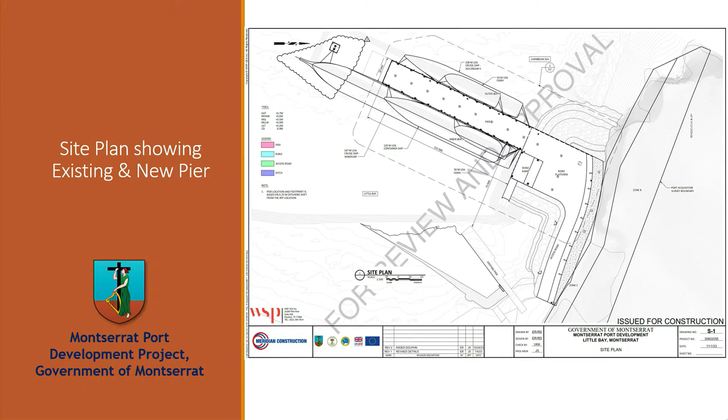So we pretty much have an idea of what we used to have there. The main focus of this project is to provide a safe harbor. It's a combination of a breakwater and a pier that we are showing here, as many people thought that there wasn't a breakwater facility being built, but it has a breakwater along with the pier facility. Here again we show the safe harbor and protection to the existing jetty to allow for berthing, as you see.

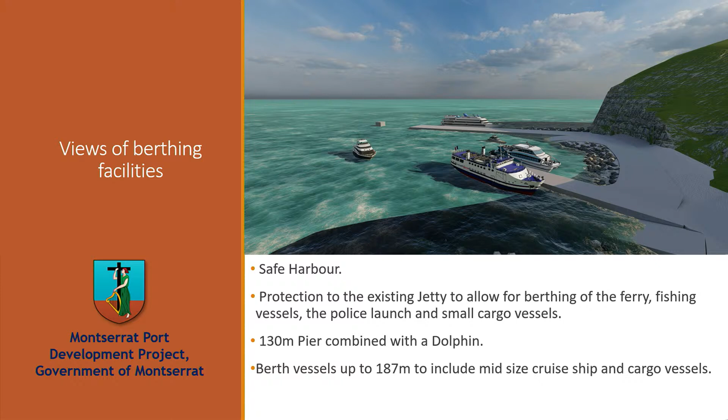So starting from the last period that we had the town hall meeting, we have come to the progress of having caissons being built. Here we show the stacking of the D1 base units and the typical units, which are the D2, on top. This is how they would similarly be stacked in the ocean and anchored to the ocean floor.

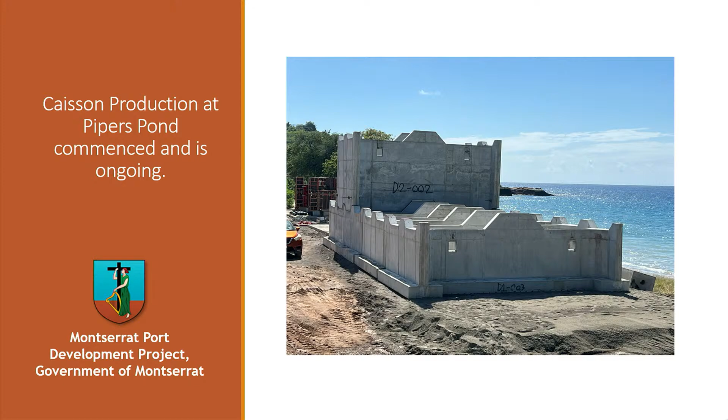In January, we had a visit from our yearly review team. Members included Dr. Kalim Shah, the head, alongside Mr. Alexander Augustine from the CDB, and Miss Anne Jocelyn from the UK's FCDO. They were here to analyze what we've done for the year and provide us with relevant feedback.

Another completion over the period was the successful submission of construction drawings to the physical planning unit, and these have been passed, which allays all fears of whether the drawings are approved for construction.

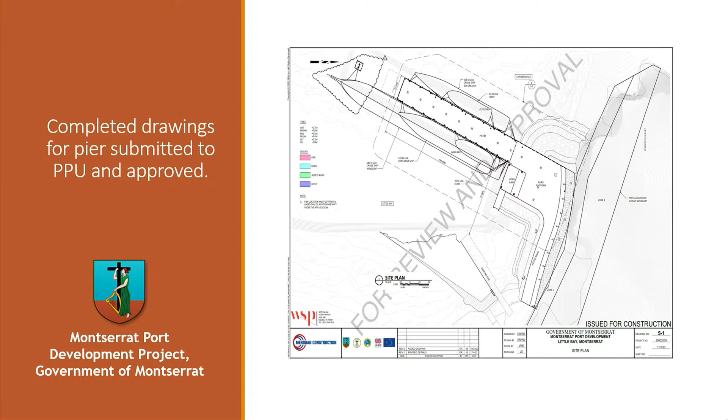Construction has started in the water, and this shows the laying of the first temporary caisson. These caisson units are going to be used - if you see this photo, this display shows where the caissons would have been placed. These temporary caissons enable the laying of the permanent caissons, which make up the Ro-Ro, and these ones which make up the pier. That is a significant milestone that we achieved by having these first caissons in the water.

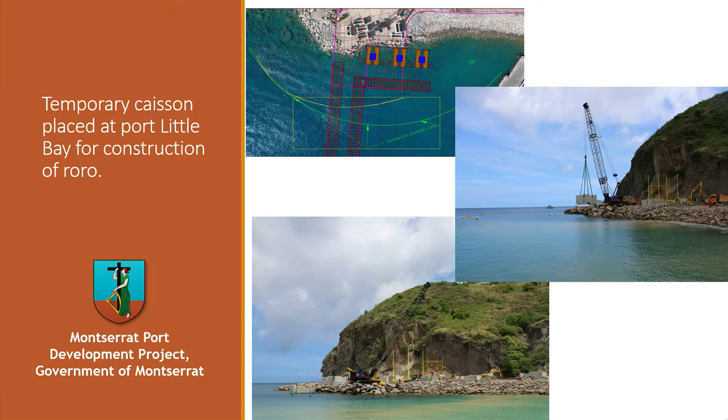We have some ongoing procurement for port equipment. So when we have our new port, they'll have some accompanying new equipment, and this process is ongoing. It includes telehandlers and forklifts, which will be used by the port in their day-to-day activities. These would be with the port way before the pier is completed.

Our most recent review mission from the CDB and the UKCIF took place in April. The UKCIF and the CDB have committed to support the project in any way possible, especially now that they've come on the ground and seen the dynamics of the project, giving them a greater understanding to help moving forward. This took place in mid-April.

We've been asked for more realistic visuals for the project. Here this evening we'll unveil some of our computer-generated images showing how the pier would look once it is completed, and it'll also show its proximity and its size compared to the other structures around.

And with that, on behalf of the ports, there's one more - this one is along the causeway, as you would have passed the existing pier, approaching the new pier.

Taking any questions? After the rest of the presentation, we'll be taking questions. Thank you very much, and that is the port project update from the port project team.

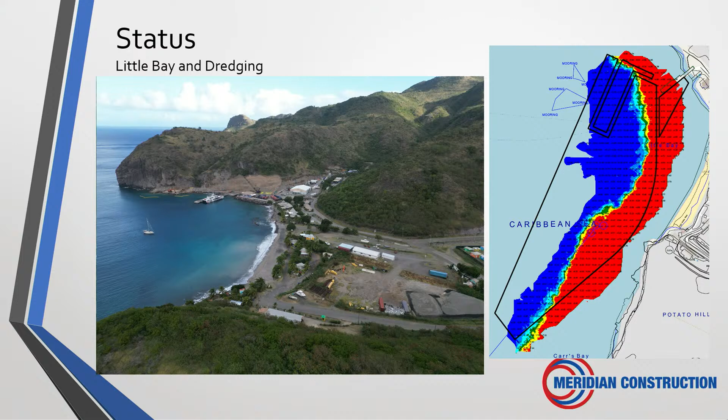On to the status of the site, there's a few things to see here. What we can see, we're still operating the quarry, getting material there for the backfilling operations.

Secondly, we've got the concrete slabs ongoing, so that will be the roadway to the port itself. Those are the concrete slabs there. As you can see, we've poured the first slab. We skip a slab and the second slab is ready to be poured. So we'll continue with that.

We've also got our drainage pipes in. So again, to show you, here and here is where there's 2 drains. That will take the runoff from the mountains, the runoff from the port area, and discharge them into the ocean, the rainwater. Then you can see we've pushed out with the Ro-Ro area and getting ready for the caissons. This was a photo taken today, and we've also got the caissons stage there ready to be installed.

One point we did want to make out to marine users and swimmers is we've got the yellow silt curtain there, which again I'll point out is here. We just ask that all marine users and swimmers stay outside that boundary. As you can see, we've got the long reach with its buckets in the water. There's subsea activities going on. We don't want anyone to be hurt, and we don't want to have any damage done to any equipment or any vessels, etc. So we do ask people to stay outside of that.

For us, we've been working through the process of putting the temporary caissons in. We've had some issues with the first caissons that we put in. We removed those caissons, as they weren't installed as per the permanent design. So I know there's been some concerns about why the caissons started to lean. They are temporary caissons. With the permanent caisson design, there's a different seabed configuration with a lot more scour protection, etc. We've taken them out, cleared the seabed there, and we're going to replace the temporary caissons in a different configuration, so that the long reach excavator there, which is in orange, and the crane, can then move on top of those temporary caissons and install the permanent caissons.

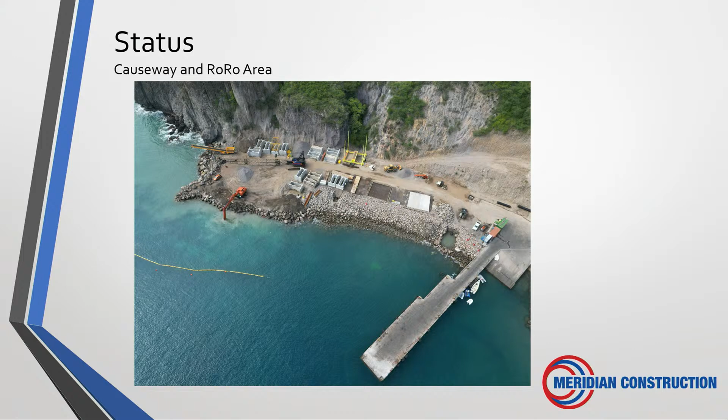Next set up here is Piper's Pond. As Andre mentioned, the production is going there. We're starting to store quite a few completed caissons here. We're ongoing with the caisson works. All the caissons for the Ro-Ro, what we call, would be the structure that will go along here. All those caissons have been cast, so they're ready to be put in the water. We're quite keen to get that structure built so we can use those caissons up, complete the Ro-Ro structure, backfill, and then complete the concrete works on top there. That's a significant milestone for us, that we have enough caissons stored here and at site so the Ro-Ro structure can be completed.

Work's ongoing here, Monday to Saturday. We have a day shift and also a small night shift working through the night to set up for day shift and keep production going. A concrete pump arrived yesterday, which will increase production, and we've got a few other items turning up in the next 4 to 6 weeks to increase production in Piper's Pond. The key here is to get the caissons in the water so we have additional storage and allow the crews to work a bit easier without so many caissons around them.

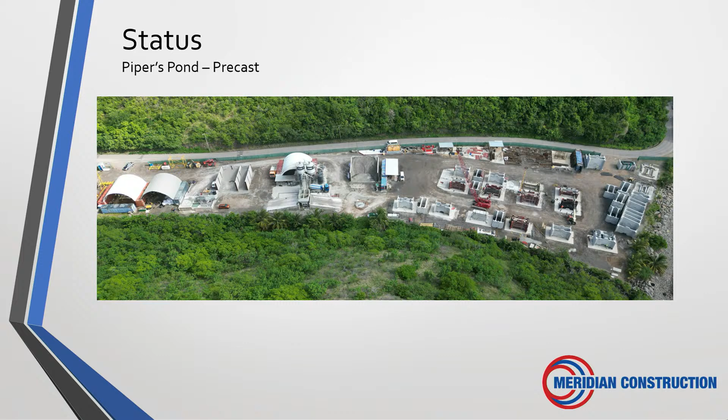So the next key steps - it'll be quite a short presentation tonight - is permanent materials. We're continuing to receive permanent materials. The last few weeks, those down at the port would have seen quite a few flat rack containers of rebar. We're now storing that in our office laydown. A big positive is we've got now a nice stock of rebar - we're not waiting for shipments.

Aggregate, cement, slags, sand, etc. - we're looking at the next order in the coming months, 6 weeks, so we'll refill the bins and stockpiles we have. We're in discussions with our suppliers there. So we'll continue with the permanent materials, and we're looking at the electrical, utilities, all those items to be ordered and come to site.

At the moment we've got our rock anchors - the devices that will anchor the caissons to the seabed. We've got the grout arriving here in the next 2 weeks, and we've just had all our drilling equipment, mixing equipment and rock anchors leave Europe, which should be here in the next 6 weeks. Once the Ro-Ro caissons are placed, we can drill and secure those caissons to the seabed. For us, it's quite a nice place to be with the materials coming, because we start to de-risk the project.

As you all know, getting materials to Montserrat is a big challenge. If we have the materials here and a stockpile of materials, it allows us to continue with the works and just replenish those materials.

The next key step is continuing the casting of the caisson units, so continue that production - we'd like to increase that production as well. Then installing the temporary caissons, followed by the permanent units for the Ro-Ro, and that will open up a lot of work for us in the Ro-Ro area.

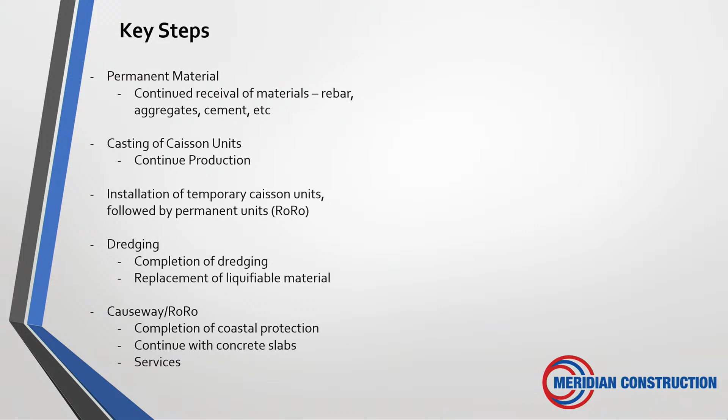Again, a brief presentation just to give an overview of where we're going. We've really moved out of design - engineering and procurement we're still doing, but we've located our suppliers - and we're really heavily into construction, and that's our main aim at the moment. So thank you very much for that. I'll hand over to Dr. Barnes and let her present about social and gender.

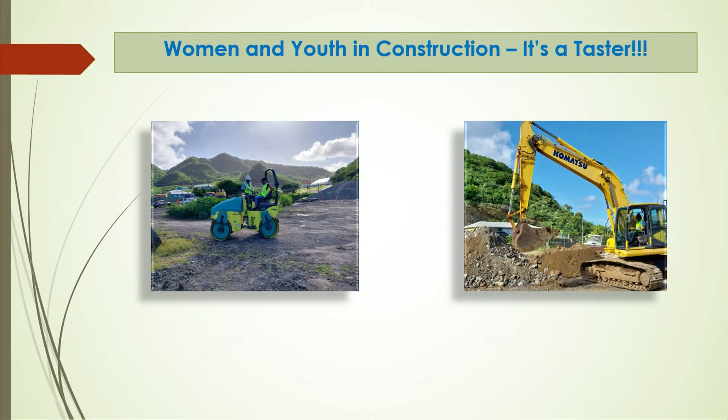We are hoping that as a result of this sensitization, interest would be built among women to engage more fully in construction and in the manipulation of heavy-duty equipment. I would say that as a result of this early work, we now have an increase in the number of women actually working in construction.

We married this awareness with work in the schools, where we tried to engage the schools in discussions about the technical and vocational curriculum. We also had a few students who came and interned with us in the summer, particularly around mechanics.

We followed up that early activity with another activity in December, which we call a triple up, because we had the heavy-duty equipment alongside carpentry and welding. We had to keep the heavy-duty equipment aspect in because women seemed to be very, very keen on that.

One comment we heard was that men have been fooling us all along, giving us the impression that it's really hard to do this. But women found out that the equipment is air-conditioned, and once you learn how to do the manipulation, it's not as hard as it seems. That was a good outcome.

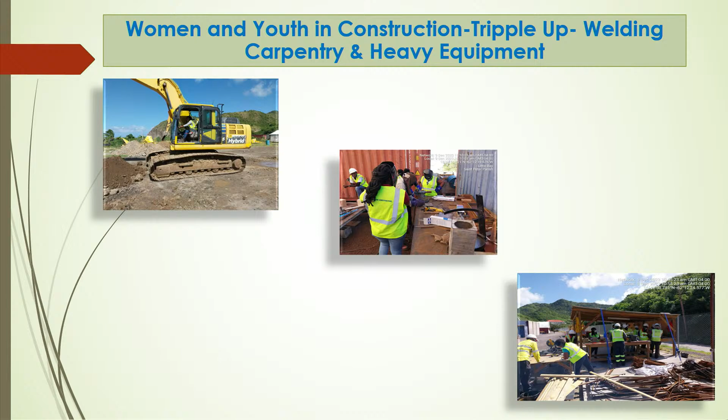Additional to that social awareness building, we have been engaging with the schools, and we engage with the youth department as well, in their careers fair, and in terms of our taking on a number of young people as interns.

Because we are very concerned about reaching youth, we have used the youth within Meridian to engage with youth. We have an intern engineer, an intern social and gender specialist, a social and gender assistant, and an environmental monitor, who we give that responsibility to. They have managed to do that very well. You're seeing in shot B that engagement.

We decided that we are going to go as early into the early years as well, as you see in shot C. The nursery schools do a fundraiser in December, and we collaborated with the nursery schools so that the early years came. You'll see in shot C that some of them are dressed up in hard hats, and they were able to ask us questions about what we were doing. We thought that if we engage our children as early as possible in things to do with construction, they are going to remember, and decisions about careers and so on could be spawned by those early exposures.

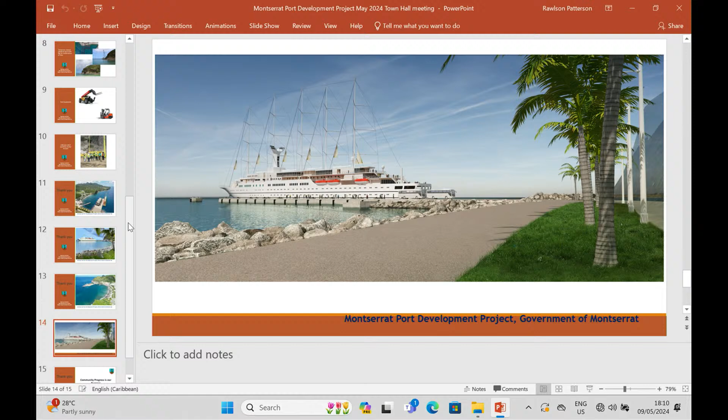Yeah, I'm assuming what you show in the right-hand corner there is the 30 meters of breakwater you're referring to. That's the 30 meters of coastal protection, yes. What I want to ask is, what exactly, what height waves does that protect against? Because we know there are different wave heights depending on whether it's a tropical storm or normal rough seas.

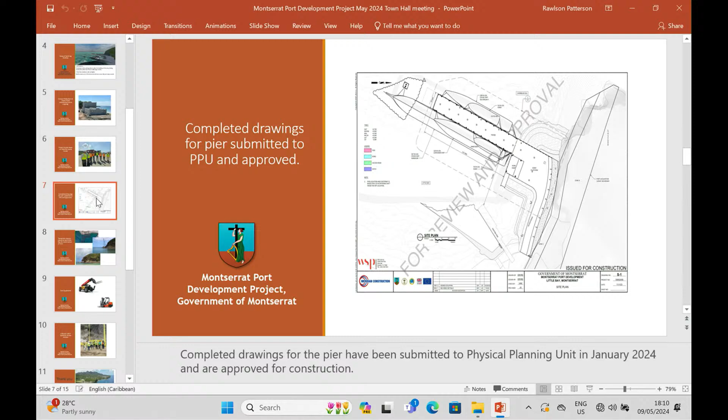The entire structure is designed for a maximum wave height of 6.5 meters. In feet, that's roughly 20 feet. So it can withstand the impact of a 20-foot wave, the entire structure. But if you imagine the height of the pier itself against 20 feet, 6.5 meters, of course you would have some overtopping in that instance, and that is an extreme case you would have happening.

Yes, David Osborne. There are a few things I want to clarify, and I like to talk straight, and I hope you guys do too. Let me go back to one point. I understand what you're saying about the little breakwater system, that it's at the start of the dock, the pier. Sea defense, okay. You have about 30 meters, you said? Yeah, thereabout. Okay, I can understand that part.

But I now understand, because you have some concrete slabs which should be filled, you said, on the inside, so it's going to act like a solid barrier. Exactly, and it also gives the ability to use the outer side of the dock in terms of calm water. But I heard you mention pertaining to the rebars for the structure that you don't need to use the coated or epoxy coated steel that's normally used, because I think you said if there's some space or defect, something like that.

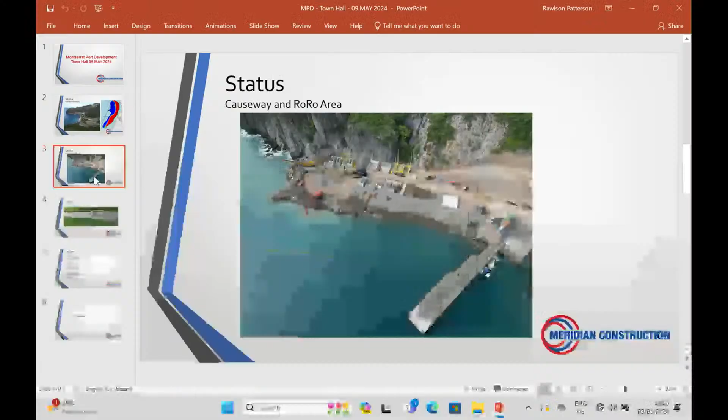Hi, I'm Katya Jobs from St. Peter's, and people know me in the past as a social development advisor.

So, Dr. Barnes, it's good to see you're on the team, and it was interesting to see what you have been doing. But a couple of issues that we have been raising from the very beginning.

If you take social, environmental, and gender issues really seriously, then what I would have liked to have seen was those issues integrated into the actual design of the project, rather than what we're seeing, which is some nice little activities on the outside which keep tick boxes and keep people happy. I don't want to put them down, but it's not a criticism at you. This is the 21st century, big companies like Meridian should have learnt lessons from experience. I've been in the industry for over 30 years.

And what I'm seeing is disappointing practice. For instance, if we're really serious about social and food security, we would have thought for this little island, how do we ensure that fishers actually are safeguarded and have proper protection and are able to more safely bring their catch easily into and on land.